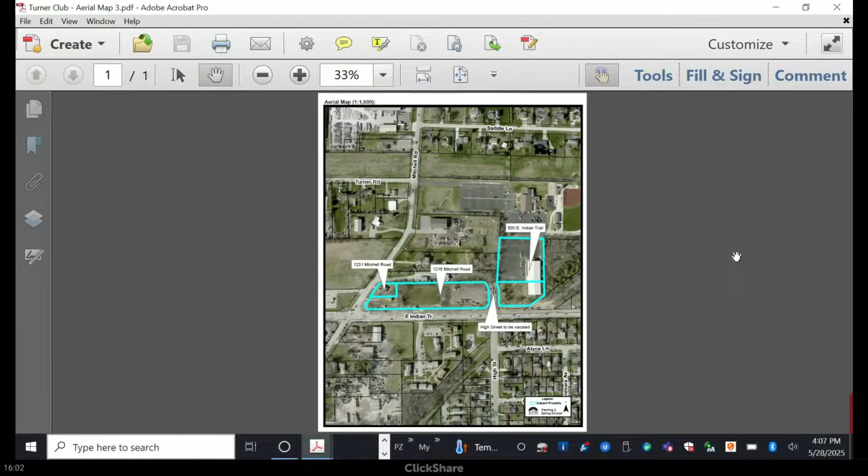Lastly, the petition requires approval of a final plat for properties located at 1231 Mitchell Road, 1215 Mitchell Road, and 500 East Indian Trail. The request includes the consolidation of the vacated portion of the street and the existing lots into 2 new lots.

Lot 1 consists of the property with the existing house, which is proposed to be demolished, and the vacant property at 1215 Mitchell Road, plus the west half of the vacated High Street. This is intended to be sold for future commercial use. Lot 2 consists of the eastern half of the vacated street and 500 East Indian Trail, which is currently utilized by the Turner Club for recreational purposes.

So that, I think, is it in a nutshell. If you have any questions for me, I'd be happy to answer.

I just have one follow-up. Mr. Lusk gave testimony prior to reading public comment, can you address that? I'll ask the petitioner, because I'm not sure how their bylaws read. Okay, all right. Does anybody have any questions? That was a question. Okay. Anybody have any questions? Okay, please.

We've presented this motion to the board and to membership three times. We have voted on it repeatedly, and it's been reflected in the records, so we're hoping everyone is on board with it. It has been approved by the board. Alderman Smith asked about the number of members: all 12 of us, 12 board members, voted and approved this.

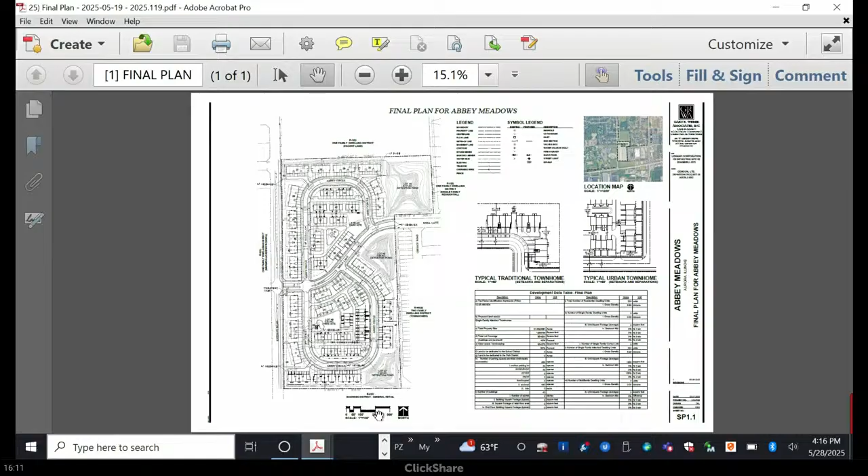So you're talking about some of this being for seniors? No, oh it's not. It's townhomes, but no age restriction. Okay, I understand, it's about seniors. So no, no, no, okay.

Fine, okay. But the people from the pool, some of them like it when there are sometimes pedestrians walking around, so that's why I'm asking that. Yeah, I mean it was part of the originally proposed market expansion, so they are part of selling the property for the development. So they are aware of what's coming.

Okay, okay, still up, come on, John. Enter. Yep.

As I mentioned, this is part of the Marmion Academy property that they felt was unused land they're not using, so they've put it under contract to sell it for multi-development. Some of you have seen the single family to the north, and some of you have voted on the preliminary for this particular development. At that time, on March 11th, the council approved the preliminary.

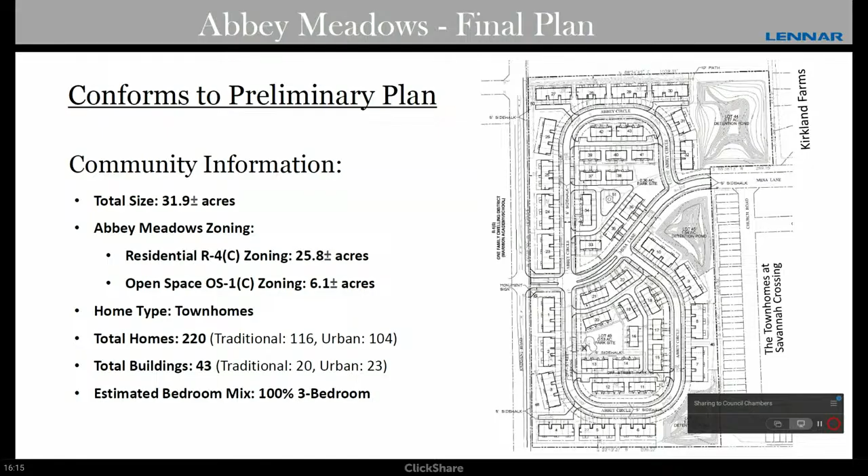This was the lot layout as far as where the buildings will be sitting. We've got a couple of park sites — one more like a sitting area, the other with a gazebo and a roof-over shelter. We'll see pictures of that.

This color rendering shows the landscape plan. As mentioned, there's a berm and considerable landscaping put in along the road. The northern edge of the property, adjacent to the single family homes, will have a larger area of screening, and again at the south end, since that's planned for future commercial, there will be additional heavy landscaping there.

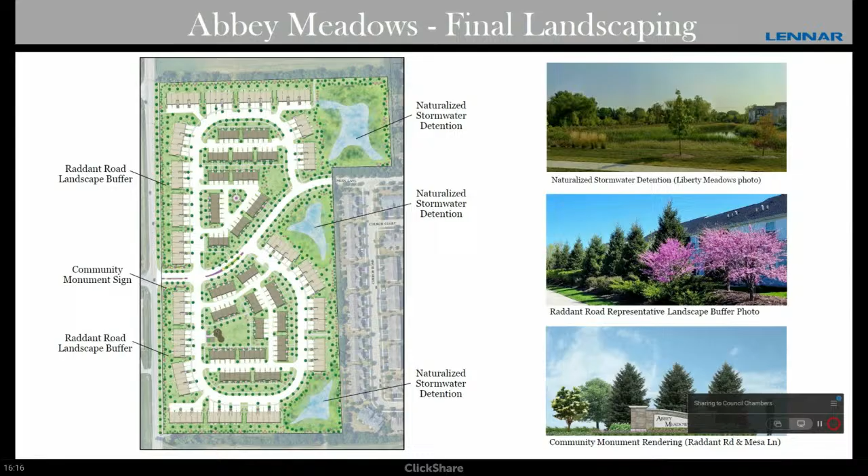And then, as I mentioned, along the eastern edge where we have the detention facilities, they also had to increase the year-round landscaping of trees going in there. You can see some of the photographs of representative landscape that it's going to look like in those colored pictures.

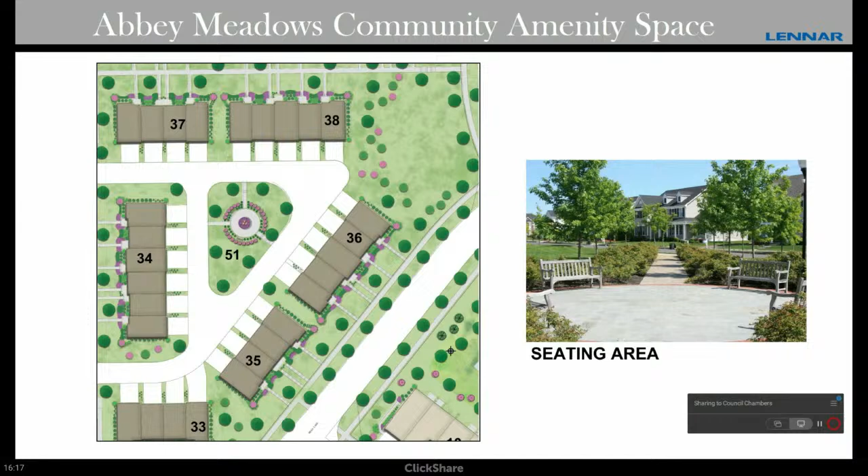Here's the example of playground equipment and the pavilion that I mentioned on 49. And there's a small area on 51 with a seating area where people can gather. It's part of the public space there. It'll be part of the owner association covenants - not public or private.

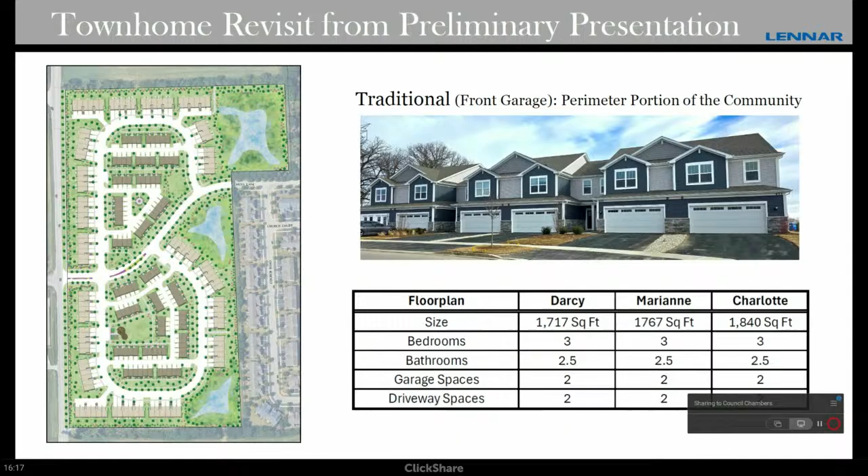This is that traditional front load garage that I mentioned - around 1,700 plus square feet up to 1,800 square feet. They're all 3 bedrooms and 2.5 baths. These particular units are the ones around the perimeter - those are the light colored units in the picture.

And this is a front elevation of the urban towns - this is a 2.5-story look if you see it from that side. These are a little larger units - you go from 1,764 up to over 2,200 square feet. They're 3-bedroom units with a rear-load garage.

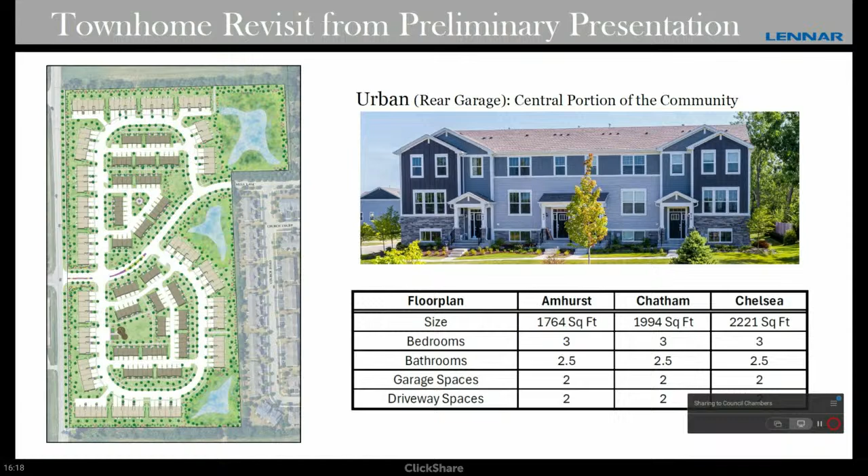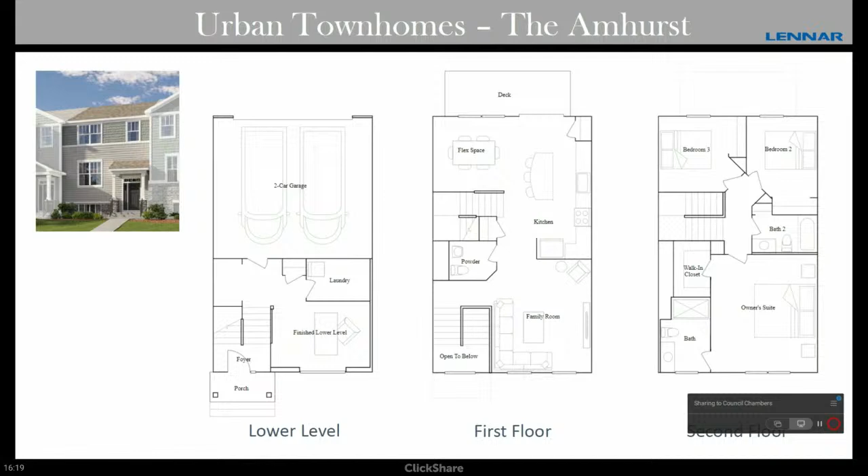This gives you an idea of what is in the low-level side garage on the urban townhome, and the first floor plan, then the upper floor with 3 bedrooms - so you can see that plan layout. These are typical of those units, and because of various sizes, some of them you can do more with - there's more area used, and 3-bed, 2.5-bath, 2-car garage.

In the initial construction, we're putting in conduit so that in the event a person were to buy a unit and want an electric or EV car charger, the pipe will already be installed, depending on what equipment they need for a particular automobile - they just run the wire for it. And although we're running that in, at some point in the future they might want to get some rooftop solar panels - that's all done, so it's pretty much in place.

We have various items in the Energy Star program that we will meet - all 2x6 wall construction with R21 insulation, attics with R38 insulation. You've got the various units like the furnace at 96% efficient, low-E glass to keep the sun from heating up interiors, and the HVAC system has energy recovery. So Lennar is designing their units to be as energy efficient as they can.

They're just drawing it as staff wished - initially had a carriage light on one side of the garage, but wanted us to have carriage lights on both sides of the garage, which makes sense. We agreed to do that, so all of the garages will have carriage lights on either side.

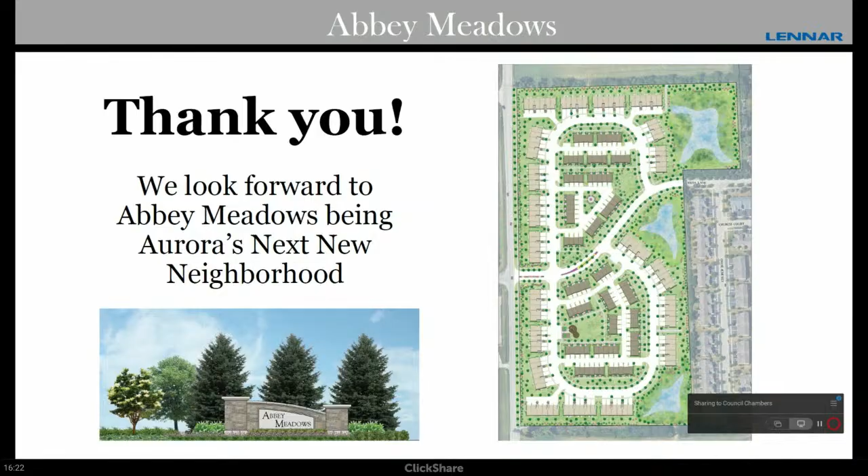Question, Dr. Garza: So we don't have basements, right? And then what is the laundry room - is it on the low level or in the kitchen? That's where you'd have plumbing - they want to have plumbing set up there for everything. Okay, yeah, important.

So talking about materials - mixed brick and stone. The stone is only in the front part, that low level, and it wraps around in some pieces around the sides. The rest is vinyl - some vinyl, and then we've got some plank, actually more like Hardie plank.

So if you look at the horizontal siding, they also do shake siding, and then also vertical siding, so it has 3 different textures to really make that stand out, as opposed to having one type of siding.

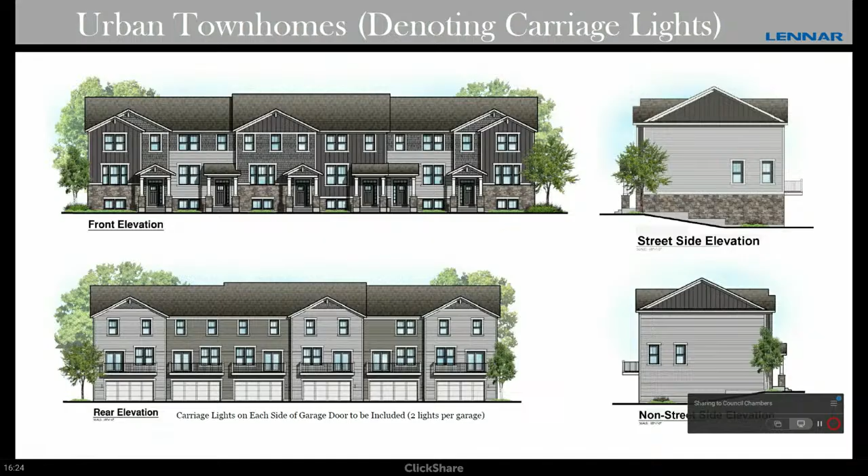There's also 3 different types of siding, with the shake up top, the vertical accent, and the horizontal with 3/1 window panes. And you can see on the side there, the side one is the side entrance, so it has a lot of pop to it too.

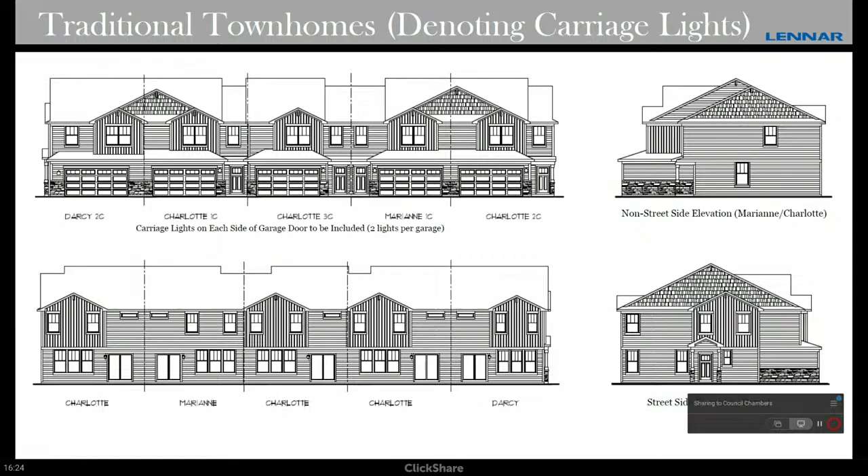The key with energy, the wall is 2x6, where a lot of homes are just 2x4. Ours actually does 2x6 construction, so the studs are deeper, allowing more room for insulation, which really frees up that wall's energy transfer.

It's good to have insulation, because some houses, like my daughter's new house, don't have insulation. The house is cold. They have a real nice decoration outside, but inside the heat is on all the time at 75, 76, and it's still cold, because of no insulation.

My hat is real estate though, and I've had clients purchase there, so it's just a nice product. I like the material, I think it's very classy, very unique, but I motion to move forward on these.

Second by Alderman Garza. I have a question for staff, just for the future, I know it's going to be ending as well. Sorry, retiring soon. This is more for staff. I really like the condition that Lennar is imposing upon themselves regarding the EV charging and solar panels, and the energy star requirement. Is there a way we can consider grading that to the standard for all future development?